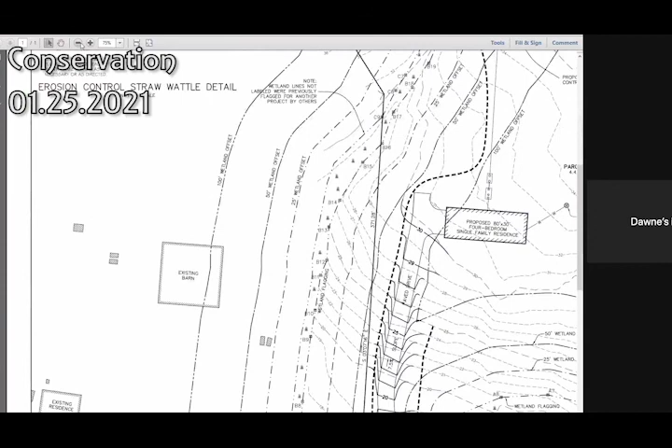First up is continued public hearing on a notice of intent for 183 River Road. So the Eagle Protection Plan has been approved by Heritage.

You sent that today, Bert? Yep. Yeah.

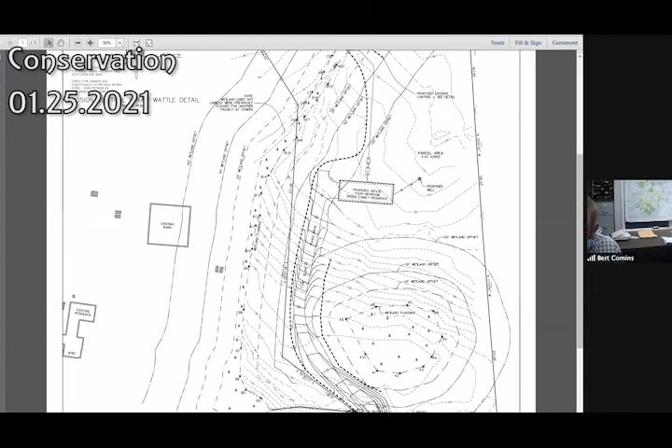So, go ahead, whoever. I just had some questions about the adequacy of the information for the construction of the proposed force main. While it's now a temporary crossing instead of a permanent crossing, there's a construction sequence on the plan that talks about damming any flow from the stream and creating a secondary sump. But I'm not sure, I don't see where that secondary sump is going to be, or how long the process is going to take.

It also talks about backfilling and compacting with dry material, but it might be helpful to have some information about what material they're using. It says use stockpiled stream bottom material or import clay material if needed. So I guess I'd like some more information on where that's coming from, and if it's being inspected by anybody. So those are my questions about the crossing.

And I apologize, I was not at the last meeting this project was discussed, and I don't know, I didn't see anything in the minutes addressing these particular questions.

Hi, Tim Collins, can I weigh in? Sure.

Yes, Tim. Thank you. So in the construction sequence, the river crossing is about a day, and probably even down to hours. Our goal is to do it where there's no flow. We have witnessed times that there is no flow. We're probably looking at an August construction date. If there is flow, it's standard practice to put in a sump area upstream of where we'll be digging and to pump around downstream so that the area we're digging in avoids any water that's coming in. What's going to be our goal, if the material's dry, is to reuse the material that we excavate and keep the existing material so we do not have to import any material.

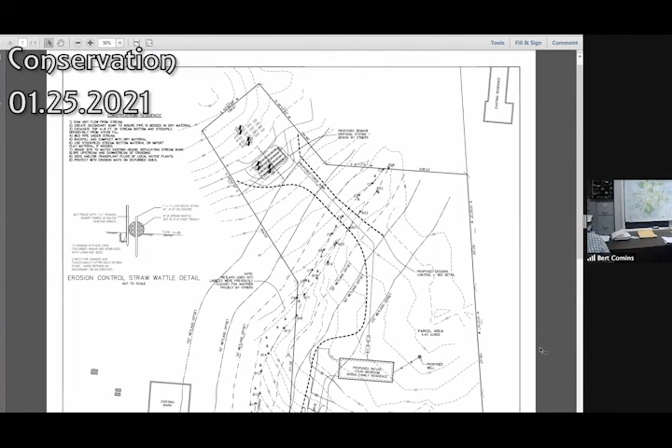I didn't see anything about what the current stream bed is. Number 6 says use stockpiled stream bottom material or import clay material if needed. Right, but I was just wondering, why I asked you why clay was, because I don't see anything that tells me what the current stream bottom is, and you're saying that it is clay. It's predominantly a clay material. The whole site is, it's got a clay mixture.

Again, I think if the material's dry, we'll reuse the material. But if the material's wet, it's going to be hard to compact.

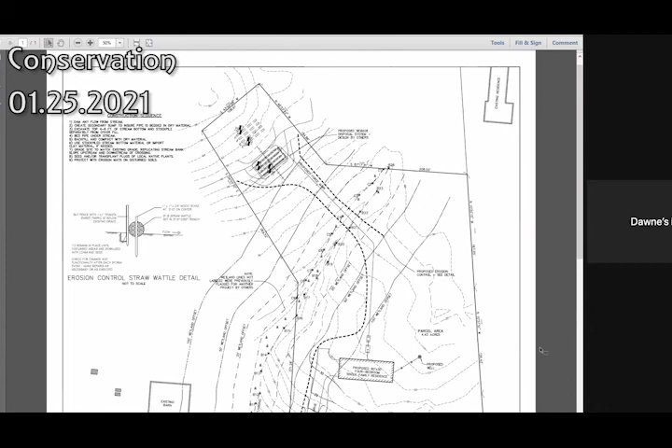You said August is when you think you're doing this, or I think the Eagle plan said you could work in July also, correct? Yeah, we would start the house lot, driveway, and foundation in July, and we would try to time mid-July to mid-August as our time frame to hit the septic system. Okay.

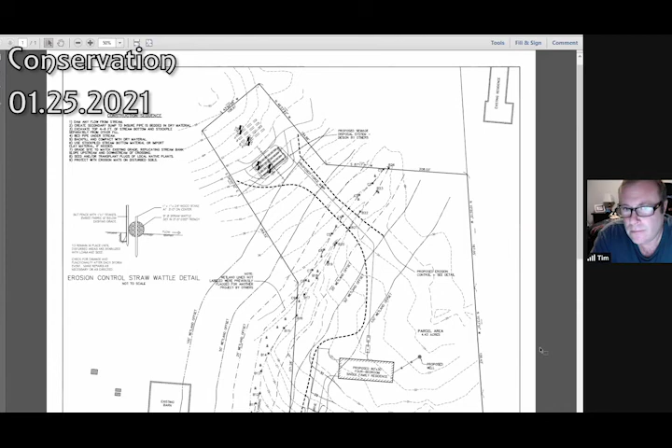Bert, could you zoom in on this a little bit on the plan? Thanks.

Where are you putting the materials that you're excavating for the installation of the main? We'll probably either stockpile them within the work area or load them into a loader to get them close to where we are, but not too far away. Most everything that we're going to excavate is going to go back in. There'll be an excess material that will probably move to the house area.

It'll be about a 2-foot trench, and we'll be doing the work. Are there any other questions?

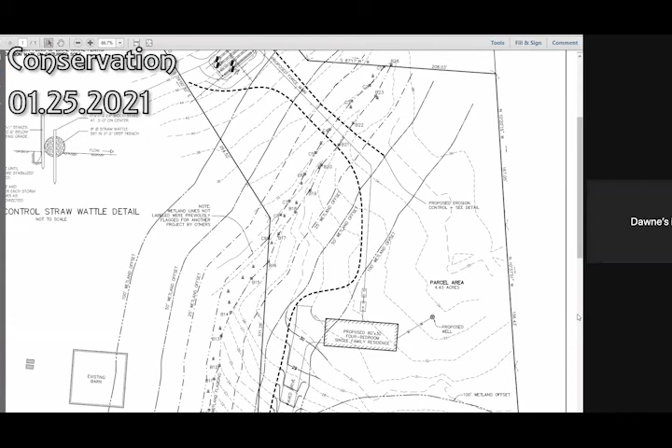Okay, who do we have? Okay, Dawn, Aye. Wendy, Aye. Molly, Aye. Tom, Aye. Me, aye.

Okay, thanks, Tim. Thank you very much. Thank you.

Next on the agenda is a request for determination of applicability for 414 Middle Street for construction of a driveway.

Whereabouts on Middle Street is this? Good evening, this is Greg Hockmuth from Williams and Sparages, representing Daniel Follansbee for the RDA filed for 414 Middle Street. Oh okay, this is the one we talked about on January 4th. It's on the portion of Middle Street that's closed just before the bridge that's out. Yeah, it's one of the Follansbee parcels. I guess it would be on the left as you're heading towards Newburyport.

We presented the project at the last hearing on January 4th, and we were ready to close, but we got into a discussion about the construction period. The applicant is hoping to construct the driveway as soon as possible and not wait until April. We were asked to put together a plan to present to the commission describing how we intend to stabilize the site during the winter months. So we put together a construction stabilization plan that includes a construction methodology, as well as some photos showing how we intend to stabilize the site.

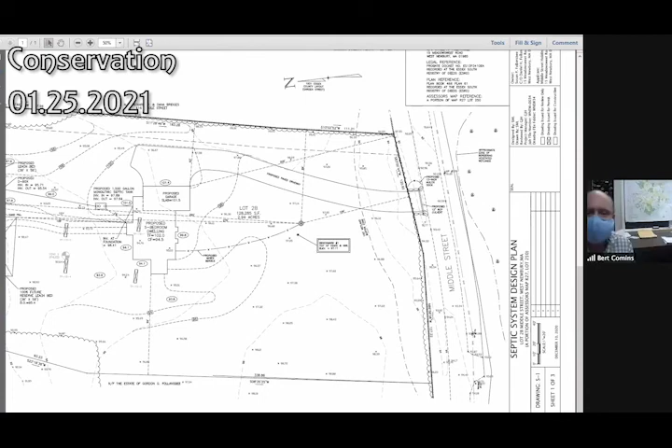So I'm just going to back up here. I have a proposed construction methodology.

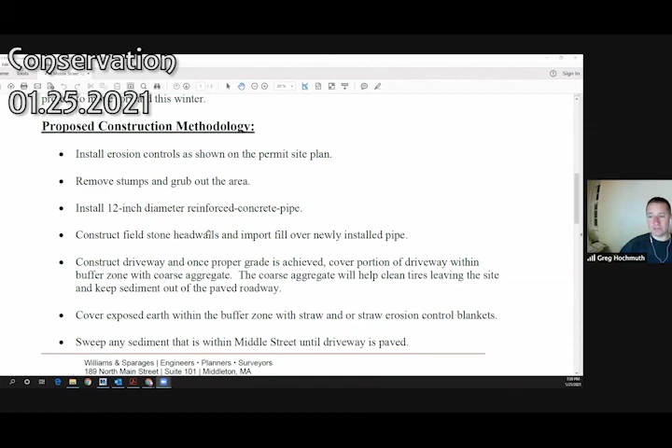And then cover any exposed earth on either side with straw erosion control blankets. Those erosion control blankets, I think they're about $60 for almost 100 feet by 12 feet — very inexpensive, and they do a great job. They come with staples. And then as an added precaution, we have another line item to sweep any sediment within Middle Street until the driveway's paved.

That would happen at the end of each construction day. Even though the road has a crown in the middle, and any stormwater should push stormwater to our side of the road, we thought it would be a good idea to keep the road clean during construction. Once the driveway's in, they're hoping to just button it up, and once the plants open they can pave it, and then it will be 100% stabilized.

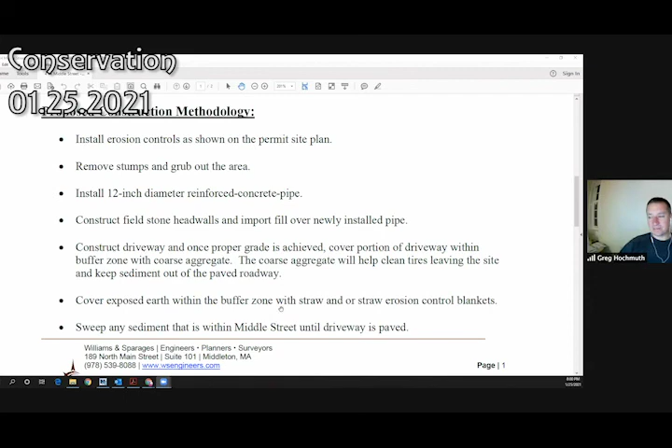It should be pretty quick with the wetlands on the other side of the road. I know the commission doesn't like construction to happen before April, but I think this can be done and the resource areas can be protected.

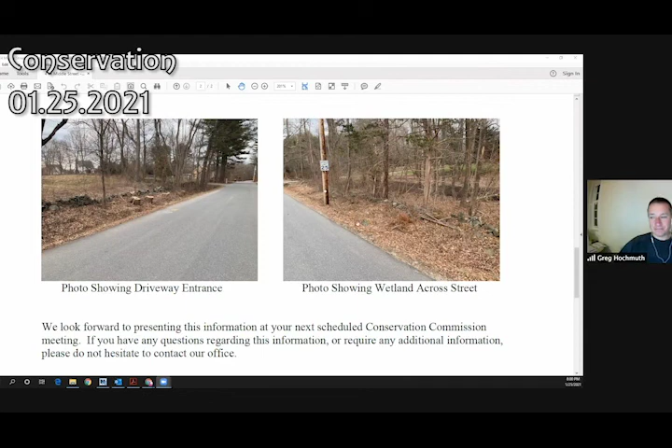Greg, when you say pretty quick, are you talking hours or days? I would say probably 2 to 3 days. Bill Spalding would be doing the work. He's done a few of these with the culverts, the ditches, and the wall breaks.

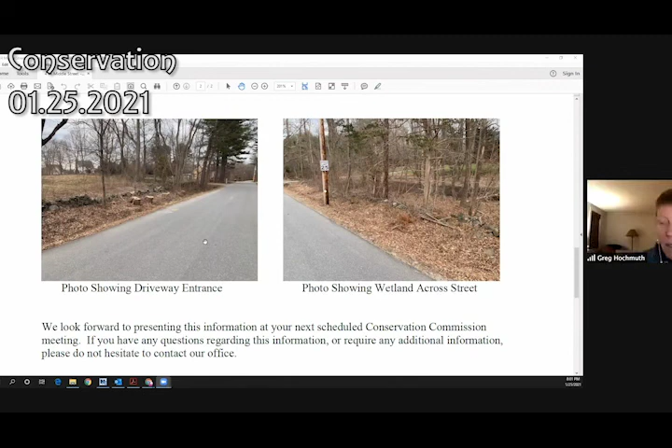I haven't read your letter. Does it have a wetland scientist supervising or being on site? It doesn't, but I'm happy to police it and even submit weekly reports to the commission if that's something they're looking for. The more of these out-of-season work requests we get, if we attach some kind of requirement for a wetland scientist to be there, that justifies making exceptions. So I would like to see that commitment in the proposal, or the RDA. We'd be happy to add that as an additional bullet item.

What is the slope for the driveway? So it's a little deceiving. It looks very flat in the photos, but it probably jumps up at least 2 to 3 feet by the time you get up. I'm pointing to my photo, but you guys can't see it.

Hold on a second. Let me try that again. Can everybody see that? Yep.

So up in here, you see how there's a little bit of a hill? That's probably outside the buffer zone, but it rises probably 2 feet higher than if you were standing in the road. And then the ditch is probably down 1.5 feet. The trees make it look a little deceiving where the roots are growing up, but the ditch is really about 1.5 feet lower than the paved surface. And up here it's about 2 feet higher. So there'll be a little bit of a cut, but nothing that can't be managed.

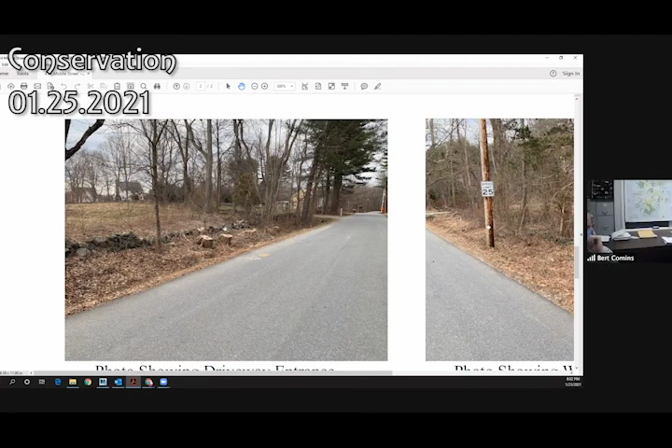The top of the subcatchment would be roughly here, and then everything from the field slopes back. So it's not a giant hill shedding stormwater down towards the new driveway cut. And I guess that's my question - what kind of runoff are you going to have during the winter?

Not much at all. It's a big old field. I think the most recent crop was probably hay, but at one point Spring Hill Nursery had trees out here that they used to pluck out of the ground and bring over to their nursery, which I think was over in Haverhill. But if you look out in the field now, there's still a big stand of, I think, beech, birch, and then some type of maple down in the back of the field.

What, if anything, are you proposing for the portion of the driveway that's outside the buffer zone but slopes down towards it? Certainly anything that would slope towards the street or have any likelihood of carrying sediment towards the ditch, we'd want to stabilize with straw or erosion control blankets. One roll should be enough to cover everything that would need to be covered, and that can be laid out in less than an hour. It's very easy to work with.

Straw is what we used to use, but you get a good windstorm, and we've had a few of those this winter, and you'd be repeating it until the ground freezes and hopefully catches it. The blankets are probably the way to go.

But your letter says that the blankets will be used in the buffer zone, and what I was asking about was the area above the buffer zone that has some slope to it. What's going to prevent that part of the driveway from just kind of running down?

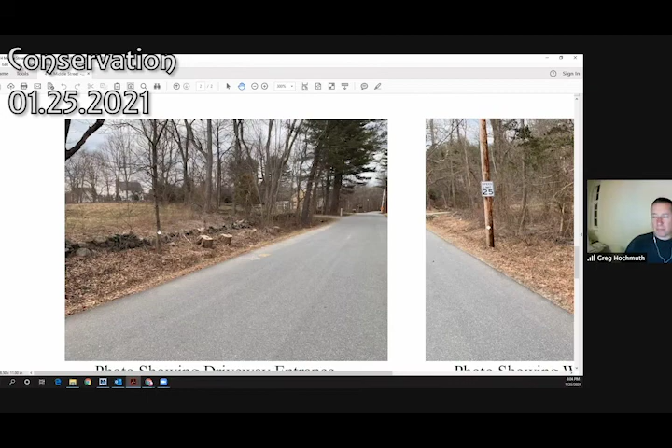Right, so the buffer zone is probably pretty much the crest of that hill. But if we had to extend it a little further to capture anything that's flowing down that way, we'd extend it. It's not your typical West Newbury hill - it's pretty flat out here.

If it was anything more than that, or there was a strong likelihood of impact to the resource areas, we would have filed a notice of intent for this. It's a fairly simple, straightforward project with minimal risk to the resource areas across the street. Really, the one concern is the ditch and anything working its way down to other resource areas, even though it's not a wetland, it has the potential to carry sediment down to a wetland. That's what we want to watch.

And is the culvert down at the end of the ditch the same size, the 12-inch? It is, yeah. The front's a little bent and banged up, but it's a 12-inch corrugated metal. You'd be a little higher up in the subcatchment and be putting in a 12-inch reinforced concrete.

I didn't see any evidence that the culvert under the downstream driveway wasn't working properly. There was no evidence of ponding or going over the top of the driveway or anything like that.

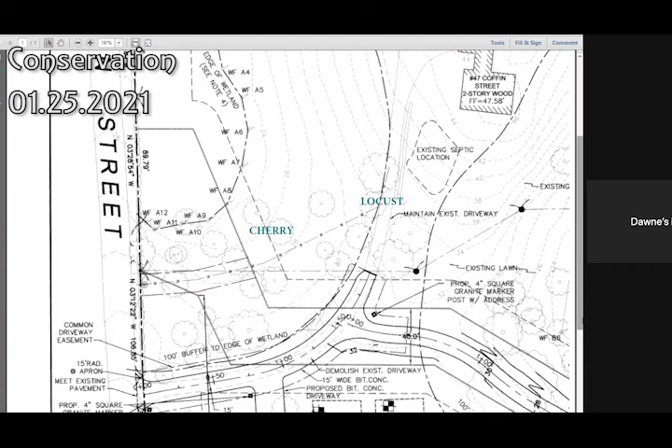Any further discussion? Do we have to vote on the amendment, Judy? We haven't voted yet, so we will vote on the request as amended.

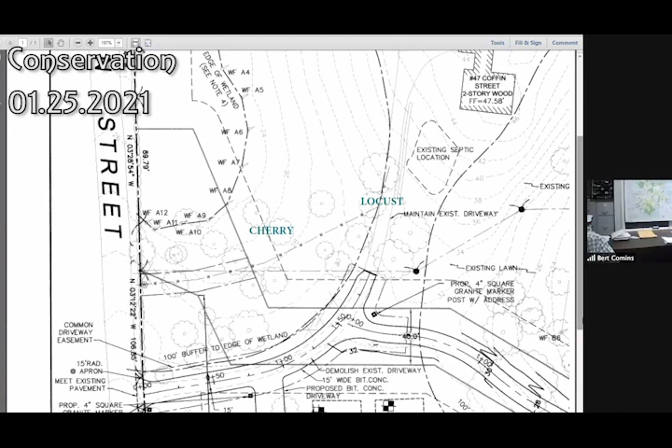Okay, thank you. Dawn, aye. Molly, aye. Judy, aye. Tom, aye. Judy, aye.

All right, next is a notice of intent by the town of West Newbury for the Middle Street Artichoke River Bridge, for reconstruction of the bridge. Good evening, I'm going to share my screen if you don't mind.

Yep, one second. All right, we're good to go. Sounds good. All right, can everyone see it all right? Yep, sounds good.

Good evening, commissioners. My name is Sara Kreisel. I'm here from the BSC group representing the applicant, the town of West Newbury. I served as ecological project manager for the project. I'm here with Micah Morrison, engineering and overall project manager, as well as representatives from the town of West Newbury and city of Newburyport. The project itself straddles the municipal line with Newburyport, and an NOI has been submitted separately for the work proposed in the city of Newburyport. The proposed project is for the replacement of the structurally deficient bridge crossing of Middle Street over the Upper Artichoke Reservoir, which was closed in 2018 to vehicular traffic due to undermining of the paved roadway foundation.

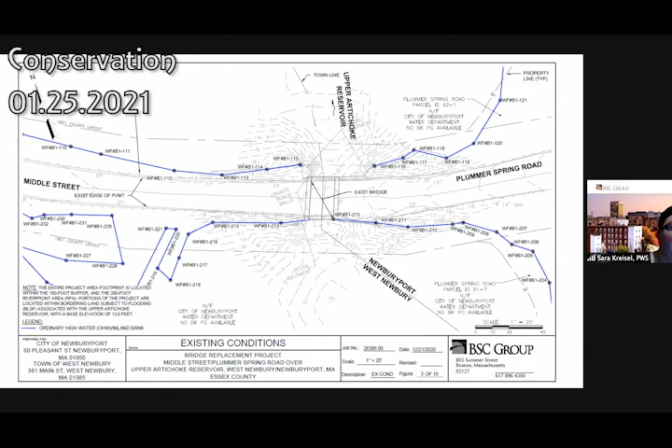The crossing is located within Zone AE for the 100-year storm event, at and below the 13-foot base flood elevation. The Artichoke Reservoir is a Class A public water supply and outstanding resource water. There is no rare species habitat in the project area, and neither the Upper Artichoke Reservoir nor the river are EPA impaired waters nor cold water fisheries.

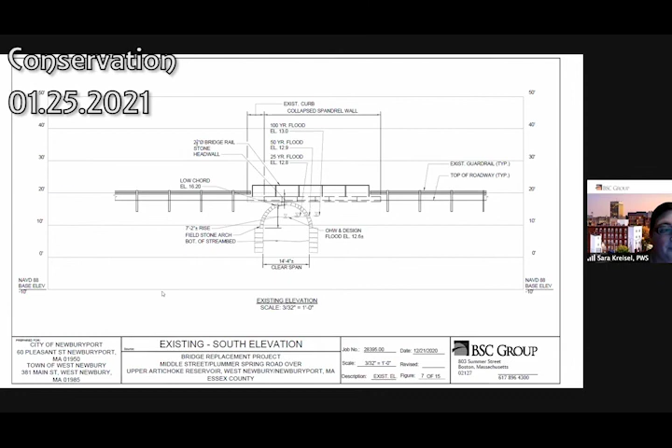The proposed project is characterized as a redevelopment project, but will preserve undisturbed areas adjacent to the crossing to the maximum extent practicable. The proposed project design complies with Massachusetts stream crossing standards as required for a limited project under the Wetland Protection Act. The crossing is proposed to be replaced by a precast concrete structure that will follow a similar horizontal and vertical alignment as the existing bridge, that will continue to have an open bottom with natural stream bed material.

The proposed span length will increase from 14 feet to 45 feet. The overall width of the bridge will be 32.5 feet to accommodate safety improvements, including a sidewalk.

In accordance with the MassDOT Bridge Manual for a rural local road, the proposed bridge has been designed to meet the 10-year flood frequency storm event, can accommodate the 100-year flood frequency storm event, and increases the hydraulic opening by a factor of 2 compared to existing conditions. Additionally, while the low chord of the bridge will stay the same, the proposed roadway elevation will be 1.5 feet higher, which will help mitigate possible roadway flooding.

The proposed bridge will have a slightly larger footprint than the existing bridge, which will improve the openness and span size over the reservoir. This in turn will provide environmental benefits such as improved wildlife passage and connectivity, and the increased hydraulic opening will better facilitate reservoir maintenance.

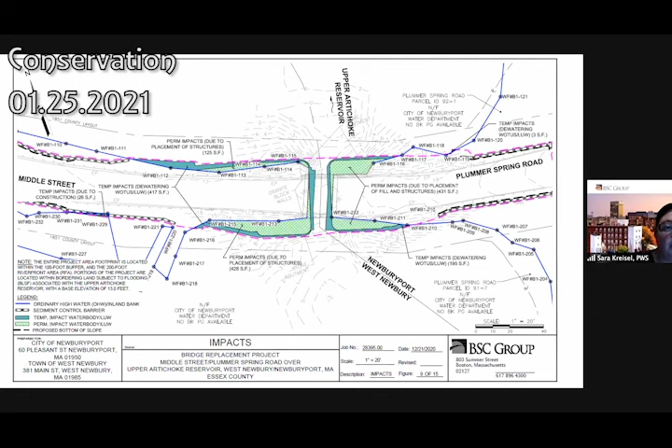Approximately 1,000 square feet of temporary impacts and permanent impacts to land underwater are anticipated in West Newbury as a result of the bridge removal, construction of the new wing walls, abutments and retaining walls, and the riprap placement to protect the bridge. In total, there's around 443 square feet of temporary impacts and 553 square feet of permanent impacts. This project is actually proposing a gain of 436 square feet of land underwater from the proposed design openness.

Approximately 175 linear feet of temporary and permanent impacts to bank are anticipated in West Newbury from bridge removal. Placement of riprap and retaining walls and reconstruction of the bank is where these impacts will be incurred. All temporary impacts will be reseeded with an appropriate seed mix. There's approximately 47 linear feet of temporary impacts proposed and 128 linear feet of permanent impacts.

Less than 500 square feet of temporary and permanent impacts to bordering land subject to flooding are anticipated in West Newbury from the bridge removal and placement of riprap and retaining walls. While storage of 167 square feet of floodplain is being altered, 311 square feet of floodplain will be replaced from this project, which will again increase storage capacity.

The total amount of riverfront area in the West Newbury project area is about 6,900 square feet. A majority of impacts to riverfront area in West Newbury will occur in previously degraded riverfront area, about 46.4%. New impacts to riverfront area will be required to ensure the stability of the new bridge structure and prevent degradation of the newly improved site.

Specifically, new riverfront area impacts will occur as a result of the new scour protection for the bridge footings and abutments, retaining walls, roadway expansion for the sidewalk, and new roadway improvements such as guardrails and erosion improvements. The additional area is approximately 1,986 square feet, which is about a 28% increase.

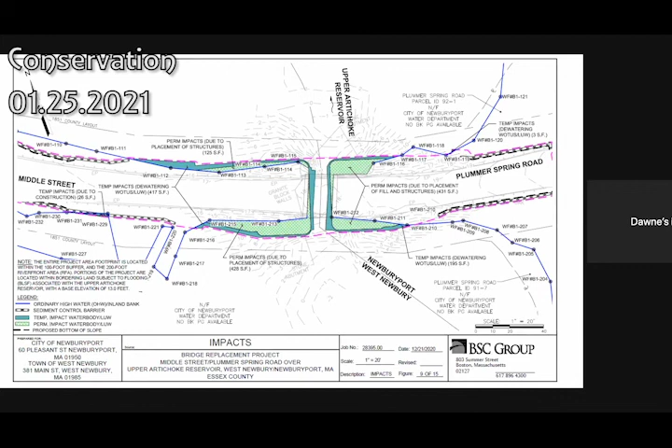So do you think they're going to start this then this spring? Or is there a general time frame? There's a number of permits we have to get in place. We're hoping to have it put out to bid in the summer. So yeah, there's still a significant amount of work that has to be done.

You said there were going to be some permanent impacts to resource areas. Correct. We're proposing retaining walls, which will actually reduce impacts by slightly increasing the width of the roadway. By putting the retaining walls in instead of expanding the slopes, we're reducing impacts from what's required. I believe that we need to increase the roadway width to meet MassDOT standards for roadway and also roadway safety.

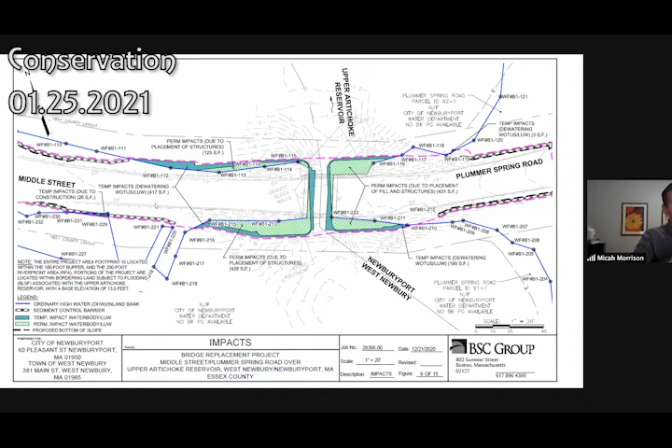Are they going to do a weight limit on this bridge, or no? No, once it's completed, there will not be a weight limit on this bridge.

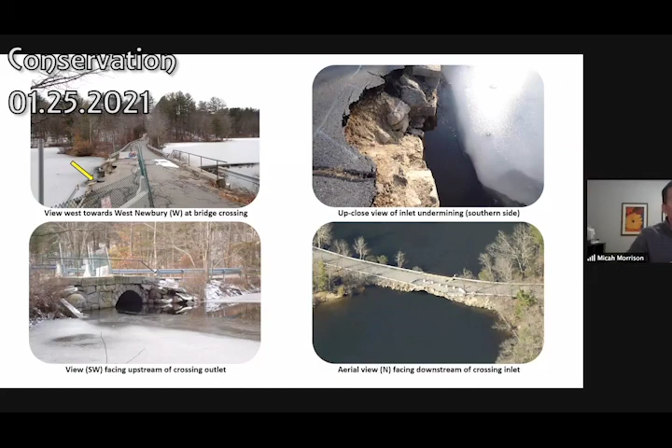Was there any modeling done with respect to climate change to make sure this bridge will be able to handle future increased water levels in the reservoir? So there's been a lot of discussion. John Eric White with the City of Newburyport is on a climate action committee, and there has been a lot of discussion about this. We are raising up the road approximately 1.5 feet. The opening can pass a 100-year storm, and so there's a lot of factors that are put into this. So yes, climate change was considered greatly.

I put up on the screen the profile of the drawing, and you can see in the top center here, there had been some hydraulic modeling for the 100-year flood. I'm just wondering if anything beyond the 100-year flood was looked at, because we've had several 100-year floods in the last couple of years.

John Eric, would you be able to talk a little bit more about this? Oh, no, we can't hear you. I see the chat. On that note, if he wants to give me a call, I could potentially put that through. I know he was having an issue with his microphone earlier. Oh, good, it's not my ears. I don't know if he was going to give me a ring or. Yeah, he just said he was going to call you. Oh, okay, I missed the chat. Sorry, yeah.

Going back to the bank for a minute, when you say additional bank will be created, is that simply because the opening is wider? Let me hold on, I'm going to take him off speaker so that's not doubling up here. So the new bank would be as a result of there's going to be new land underwater. The bank is just going to be reconstructed. Well, your notice says additional bank will be created where previously it did not exist. Along the retaining wall areas. I'm sorry, yeah.

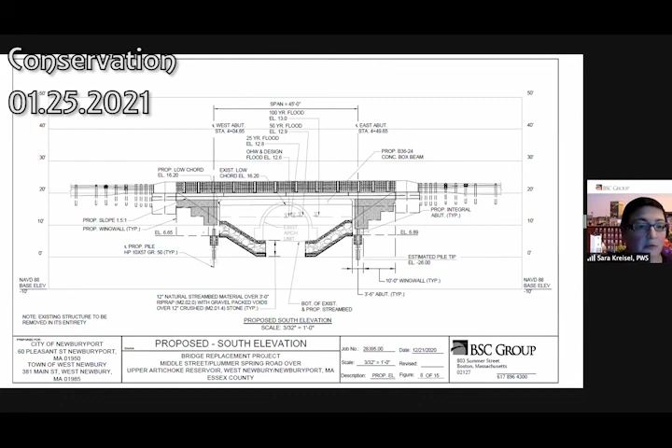Yeah, would it be possible for us to get additional copies? Just with the remote meetings, it's easier if we all have our own copy. So a hard copy? Yes, unless there's an electronic copy of the NOI. We have electronic, we've got hard copy, whatever you prefer. I can forward it to you right now if you'd like. Yeah, for the NOI that's fine to be electronic, but the plans, it's much easier to have a full-size hard copy. Five full-size 11 by 17 hard copies were submitted.

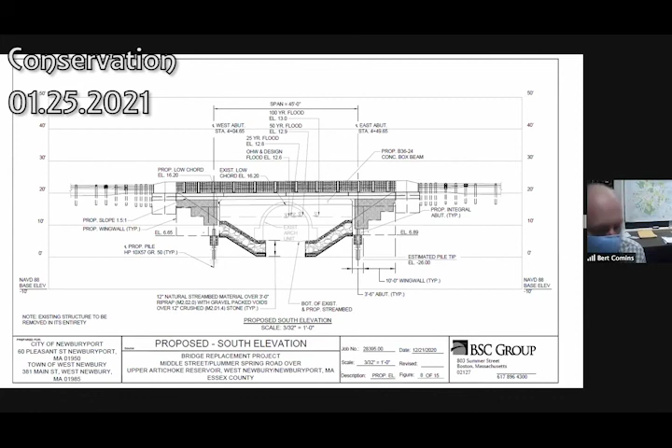Yep, Wendy, the NOI I did send in an email too. I just looked for it, I didn't see it. It came, I think, today, Wendy, and isn't it like 80 some odd pages or something? Last week sometime. Oh, last week? Last Monday, last week. Okay, alright, I mean I can resend it to you.

And 93 pages, to answer that comment. 93, I knew there were a lot because when I started reading it, I thought... and there's cover pages, yeah, it's a lot. Want to make sure you have everything you needed. Well, thank you.

So I don't see John Eric dialing in here. We just have the same attendance. Did we lose him? I'm not sure. I also forwarded them the information.

So what's the overall length of the project expected to be? Do you have a time estimate for once you begin construction? Yeah, so it will be over a year in length, probably upwards of 450 to 490 days.

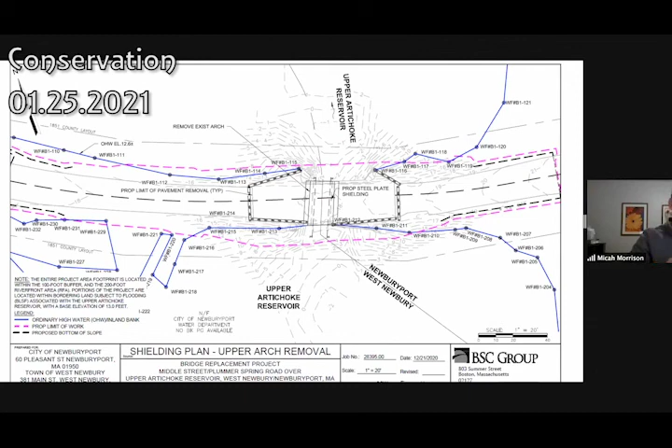I should note I'm also sharing the page still, in case people aren't looking, just to assist.

And after that, they will be driving piles and building the abutments of the bridge. Once they get the abutments built, then they would build the actual structure above.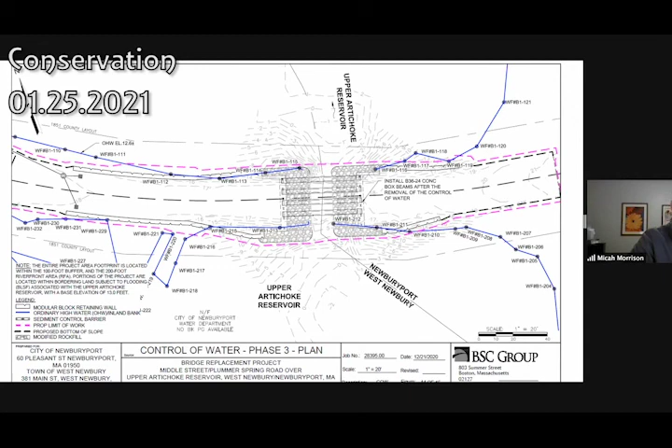I believe John Eric has joined at this point. Can you hear me? Can you now? Yes, very clear. Nope, he just got muted. There we go. So with my brand new computer that I got for this COVID situation, the video still freezes my computer, and I've got no control over that. I've got to figure out how to get around that. I cannot see what you folks have. That is fine, but as long as you can hear me, we can go back and forth.

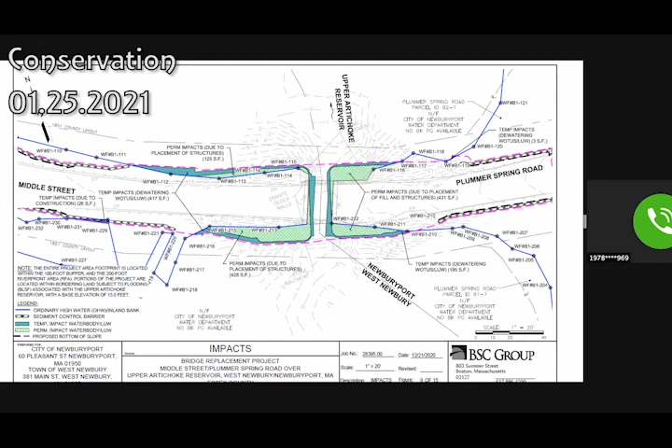So as far as climate change, this bridge is going to be more than adequate up to probably the year 2110. So the way it worked was we did the best that we could in our city.

Our resiliency plan, our resiliency committee, formed a subcommittee to determine the future flood elevation for one of our waterfront projects, the NRA Waterfront West. We spent weeks and weeks arguing and debating what future elevation we should comply with. There are a million studies out there: IPCC, the whole 9 yards, Boston, everyone, the Bragg report.

We concluded that if we can design for a 6-foot rise in sea level around the year 2100, that will satisfy a lot of people in town and head us towards the right direction. Using that theory, this particular area...

Right downstream of this bridge is a dam, that's elevation 12.3. The FEMA elevation in this area is elevation 13 for the 100-year storm. So at elevation 13 for the 100-year storm, our recommendation for our town downtown for that project was add 6 feet to FEMA.

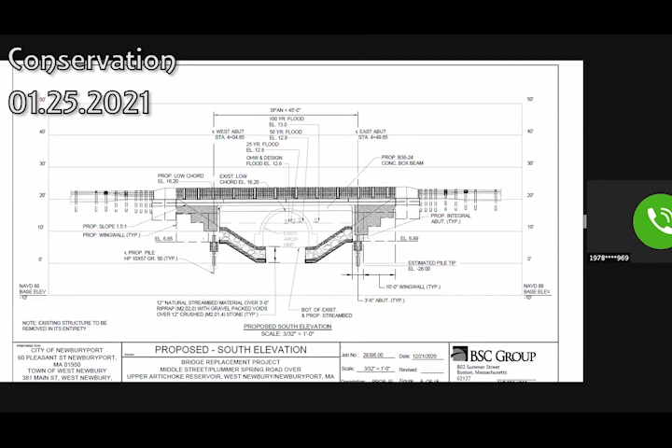I'm assuming this project was coordinated with the other proposed NOI down at the spillway regarding changing its height. For the spillway, we're still in front of the commission just for the foundation, which is simply getting the foundation in so we can sandbag to protect against a storm today. We're 3 feet below the 100-year flood right now. That foundation has nothing to do with future sea level. We'll need to go back in front of your commission when we're ready to raise the dam, so those are two different things.

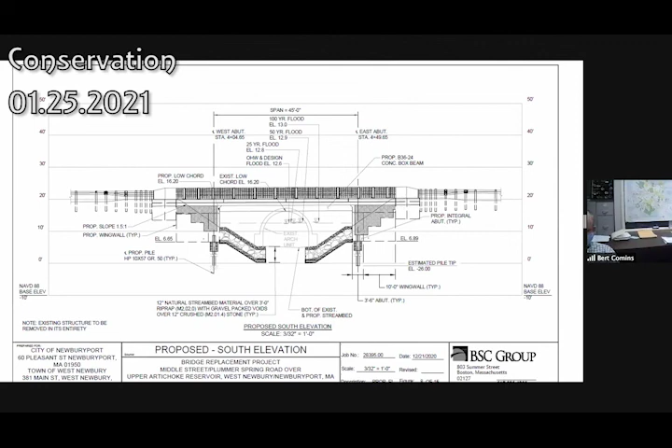You described the siltation barriers and erosion control as compost filter tubes. Could you explain what you mean by those, and what size? Who's that question directed to, since I'm still trying to unfreeze my screen?

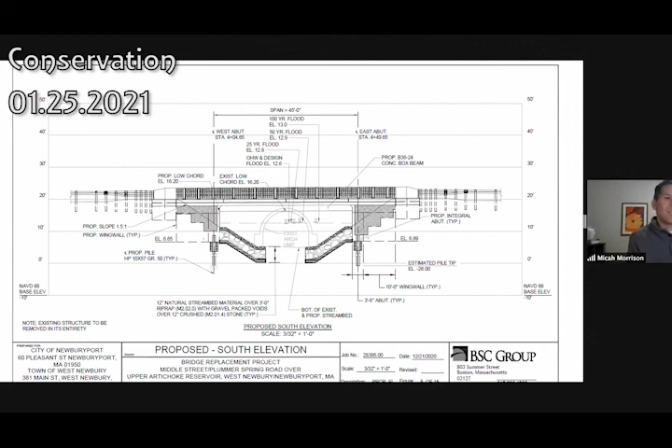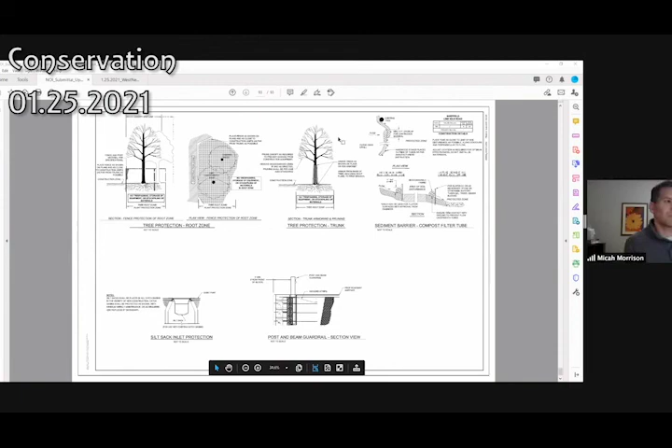Sara, could you go to the end of the NOI there? Give me one second, I'll have to stop sharing. I don't think I brought that last page in. I think I just lost sharing again. Let me bring up the NOI instead and move that around. Is the NOI sharing right now? It says it isn't very large, I'm working on it. Is that better? Oh, it says my screen sharing is paused. Resume share, does that work? Okay, beautiful, so you want to zoom into the compost section. I have to move my own computer to get there, sorry about that. There, all the way at the top right corner.

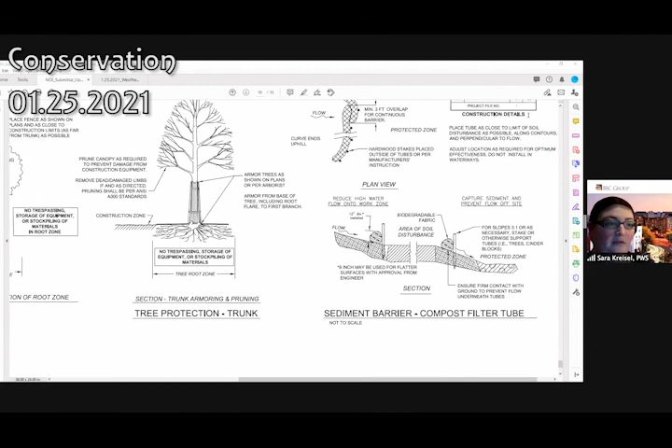So this is the last page of the NOI that you have. It's a biodegradable material within a biodegradable fabric, similar to straw wattles. It's a standard MassDOT item used on all their projects, and they're 12 inches in diameter. If you look at this detail, this shows how they'd be installed, taken from our MassDOT projects. If you have further questions, we could supply additional information like a cut sheet.

Are they backed by silt fence there? They generally are not, but that's something we could add if the commission wanted, particularly since it's going to be in there for a while. The other thing I'll do is make sure we have extra quantities for the compost tubes, because if they start to decompose we'd want to replace them. So I'll add quantities into our contract to replace them when needed, especially since we don't know the time of year, because in winter they can really take a hit.

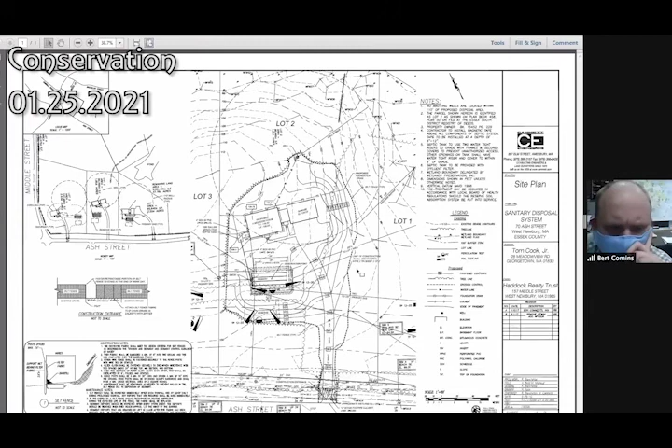Yeah, you got it, Bert. If you could put up... did you submit a digital copy of the as-built? Yes, we did. There should have been plans electronically as well as physical copies. I submitted 5 physical copies plus. Yeah, I have the physical copies.

Okay. I think I might have them with me. I'm not sure if I can get to them. Yeah, I thought I had it. I don't see the as-built in your email here. All right, let me see. Bert, have you looked at this at all?

Yep, are the markers in place? The markers are in place. I do have a copy with me, electronic copy of the final as-built that was submitted. At least I believe I submitted it. Maybe it got missed, but if I can share my screen, I can probably get that to you. Is that okay for me to share the screen? One second. Yeah, we should be good to go. Okay, let me try that.

Which house is this? This is the 3 houses on Ash Street. The new ones? Okay. Yep. All right, is this the middle one? Yep. Okay, can you see that on the screen now?

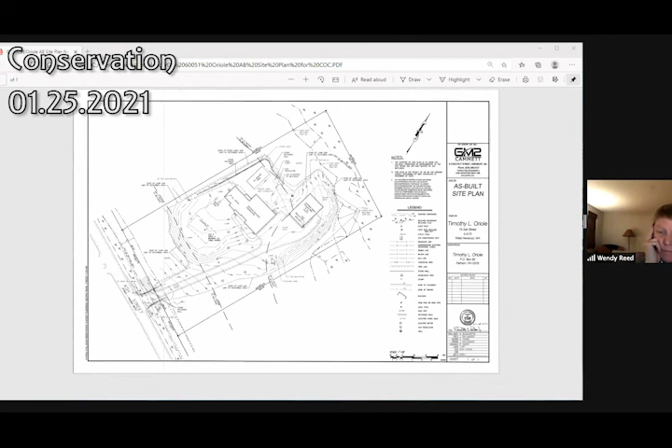Were there any vegetation requirements, Bert, on this that needed to go through a growing season or anything? I don't recall. Special conditions? There's nothing in the order about that. Okay, the site is very well stabilized. They did sod back early in the fall, so it's all stabilized, and the erosion controls have been removed.

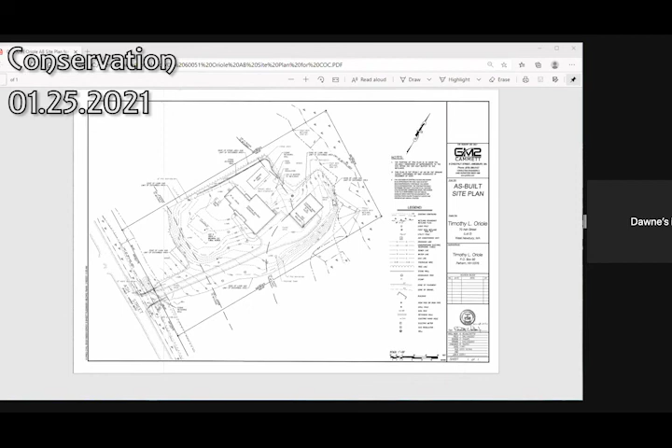All right, so why don't we continue this to our next meeting so we can look into exactly what that means when they say it's prohibited, whether it's just oil or oil and gas. So that's not a condition on the state form? That's part of our form, right? Oh, that's ours? Yeah, I should be more specific about that. That's on the West Newbury standard condition. But it might be helpful to find out what DEP's thoughts are on underground propane.

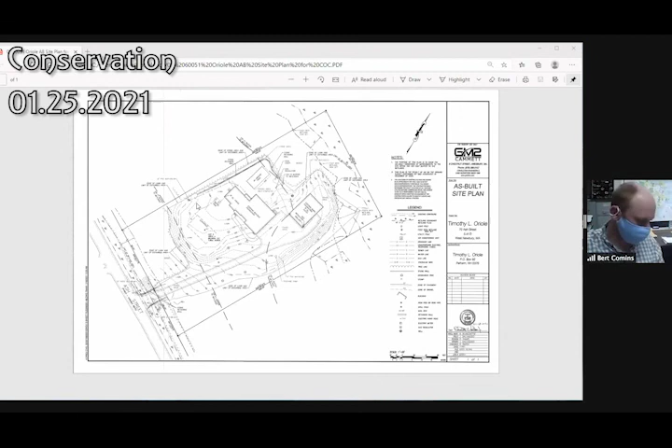All right, next on the agenda is a request for a certificate of compliance at 171 River Road. That's also me, that's Mr. Harris, for a dock he installed last fall.

Could you just make me the host again? I do have that as-built, so I can pull that one up. If you drag your cursor across my screen, there's the three little dots, if you click that it should say make host. What do you want me to do? Drag your cursor across my screen. Yep, I got the three dots. So click the three little dots and then go to make host. Did you find it? Yep, I did. Good. Oh yeah, Bert, the host. All right, thank you.

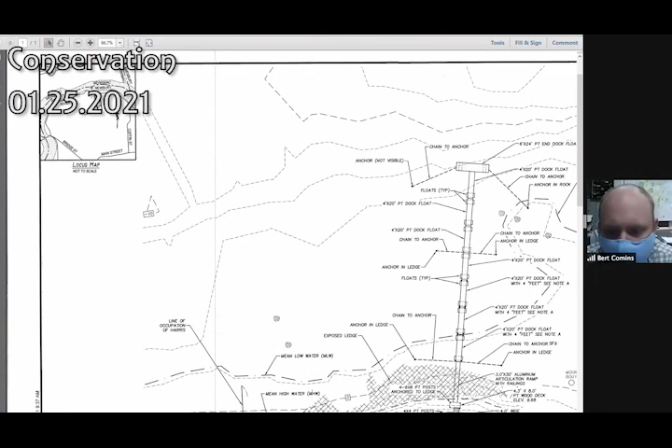Okay, so you can clearly see now the layout of the dock, which is exactly the way it was designed and approved. The only slight changes were, I don't know if you remember during the notice of intent process, there was a couple of trees down in the area of this landing, and it was suggested that we just move the landing over to not cut the trees down. So we did that, and I think there were a couple of trees right where the walkway would have been, real close, so by sliding it over we were able to avoid cutting any trees down to install this. So it's slightly in a different location here.

The sizes and dimensions are all the same, just slightly shifted to avoid removing a tree. So other than that, it's built exactly the way it was approved. The only issue, if you look at my letter, is that the chains he used were not the ones with the spring or elastic rods noted, meant to keep them off the river bottom. If you look at the photos I included with the application, the river in this entire area is a rocky bottom area, there's very little soil out there. I took the pictures at low tide, and you can see the chains and the rock all through here. All of the anchors holding the floats in place were driven into ledge, with a clip so they could hook the chain to it. It's all rock, and you can see some boulders placed out here in this little section.

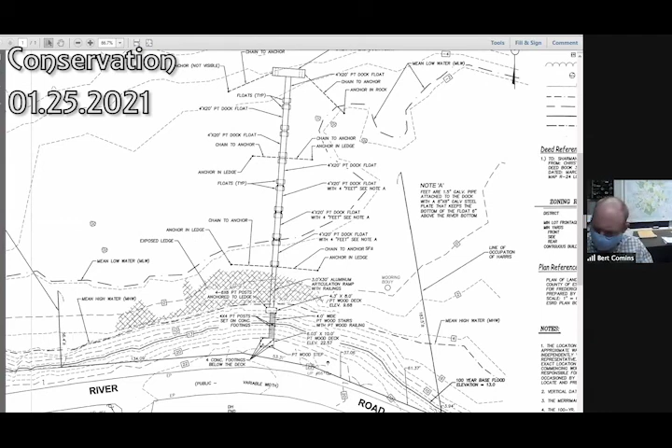So we can get that done. But we appreciate the submissions, we really do, but we do have to make sure they comply with the orders. I don't disagree with you. I was just trying to make a case, that's all.

Okay, thank you. So I guess we've got two options. One, I can make contact with Heritage and see if they will approve such a thing, and they can write a letter. The other option would be simply to install the rods, the elastic rods, which are thousands of dollars. That's why we'll make the attempt to go the other way first, since it's not a lot of dirt there on this part of the river.

Well, and maybe he should contact Heritage.

I'm going to do that and get a decision from them. They may want to come out and look at it. I don't know, but right now they're not in right now. Everything's been removed for the winter. We'll have to wait until they put them back in, or just get an opinion based on the photos I took at low tide back last fall before they took them out.

Those are submitted with the application, so you can see it. I have others I didn't submit because I took like 20 or 30 pictures, but I only submitted 8. They generally looked at the typical conditions out there. But I will make that thing, and we'll continue this and see where it goes.

I'm not sure I'll have an answer in 2 weeks, but... well, you might. I might. But that's the best bet we can do. Okay, all right, sounds good. Thank you very much. Okay, thank you.

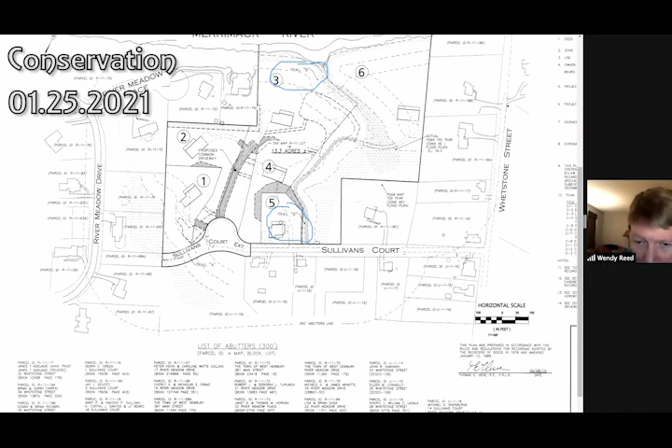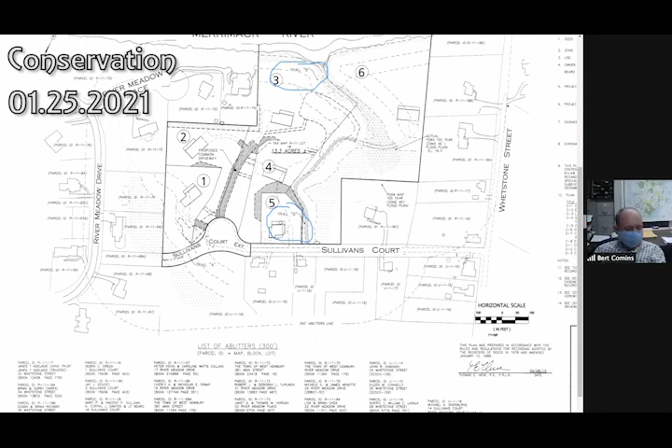Yeah, 6 feet seems too narrow. Wait, so you're talking about the plan for Trail A? That's an 8.5 by 11? Yeah. Okay, I have the original, it's a half-size plan, it's much bigger. So this is obviously a copy and it's been reduced. So that's a problem too if we don't have a scale, right? Yeah. All right, I'll talk to Tom. Gird yourself, Bert.

All right, so what's next on our agenda? Clarify how the width of the easement is. Next is the MVP contract.

Did you get any response from Jen on that about the invoicing? Yes, I did. So he submitted the same letter as last time, just updated. To either the end of February or the middle of March would be enough time. I still don't have an invoice from her. Or wait, no, sorry, yes, I do have an invoice from her.

So there's still $1,069 available on the contract. And you think that will be enough? Yes. So far she's billed for 10.5 hours. So it looks like I just need to get this extension letter signed, I guess. Yeah, Dawne needs to sign it. Want to put it down with the plans? Yeah, I'll put it down there, and I'll talk to Jen tomorrow and let her know that.